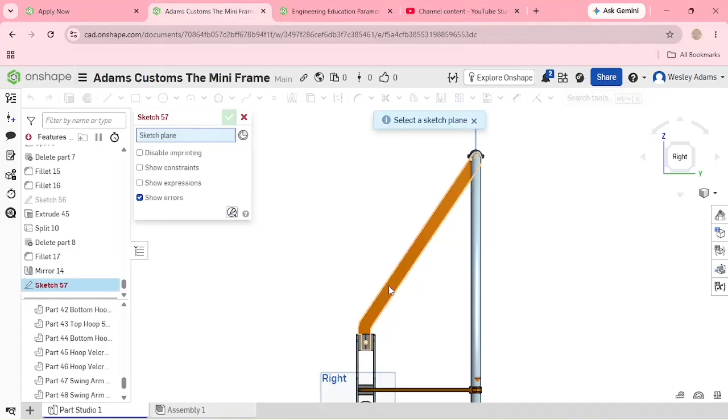Left click on the spar, left click on the line tool. Let's come down here, let's come off of that. Left click here, we'll touch this line, and that'll let us know that we're parallel there. Then pull that away and hit escape.

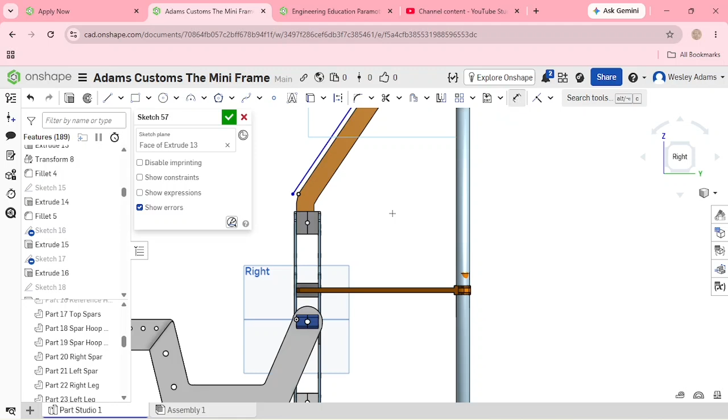Left click on the line, or left click on the dimension tool. So we'll go left click here, touch this line, pull this up. We'll make sure that's parallel.

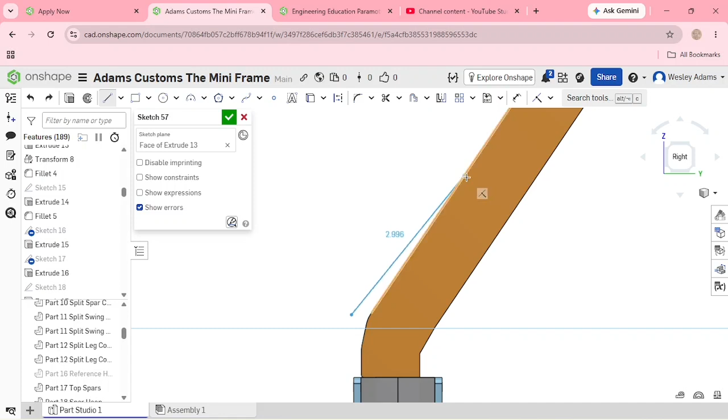All right, we're going to create the line. So let's select the line tool. Come over here, do not connect it to anything, so no yellow dots. Now we can come over here and make sure it's parallel. Let's bring this up. Left click, pull that away, hit escape.

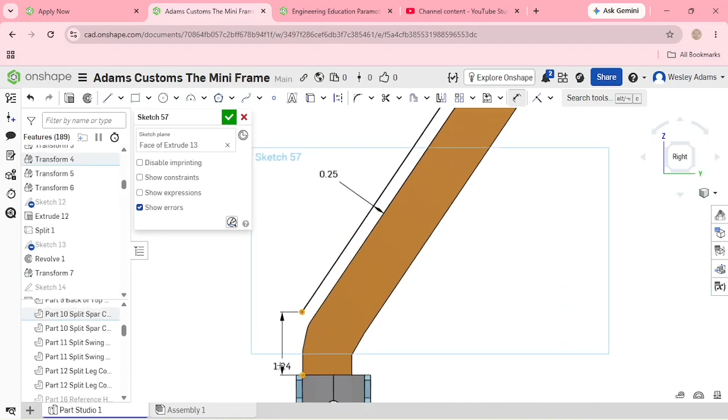Now let's go back down. Let's take this, select that line, select that one, and go 0.25 inches. Then we'll select this line to there. Let's go 1.25.

Green check mark, pull that away. 11.16, green check mark. Let's go ahead and make this line, very similar process. Let's pull this away. Make sure it's parallel. All right, green check mark.

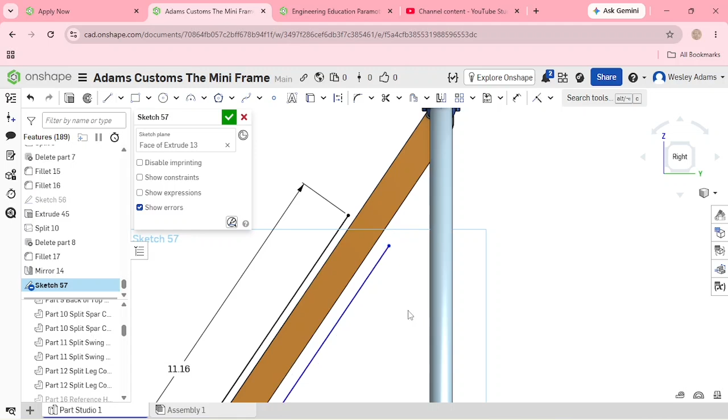Or go ahead and left click dimension tool, left click on this one. Let's make that 12 inches. Let's make that a quarter inch away, so 0.25. There we go.

Let's move that line up. So I'm going to take the dimension tool off. I'm going to left click on this blue line. I'm going to try to pull this up and keep it parallel.

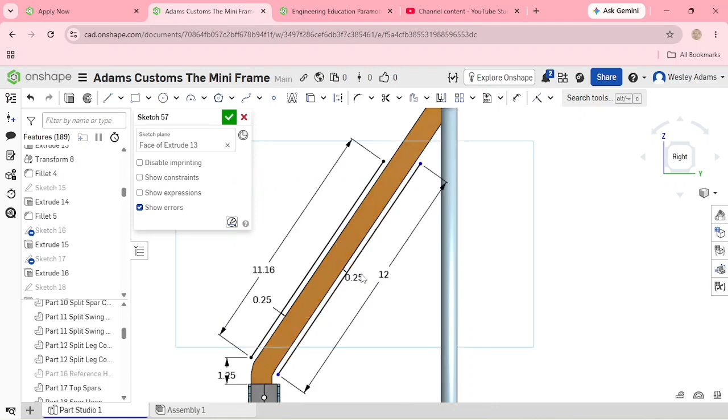So I'll select dimension tool, select here, here, left click. Let's do 0.80, I should move that up. Good, and we want those to be offset like that.

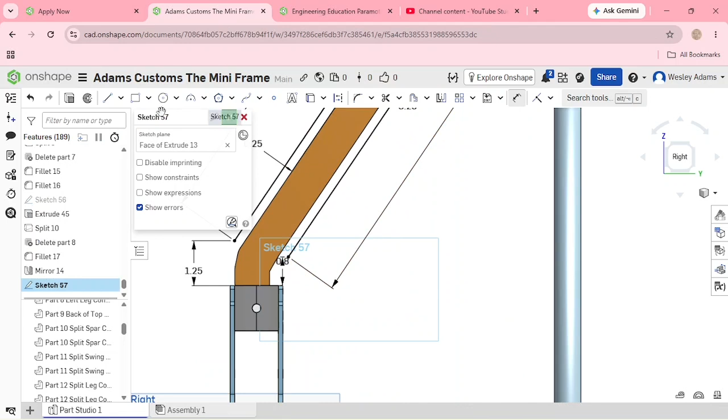So let's go left click, click on this one, click on that one. Doesn't matter the length there. Let's go up here, we'll connect these lines. Left click on the line tool, left click here, left click there. And I think we have everything set.

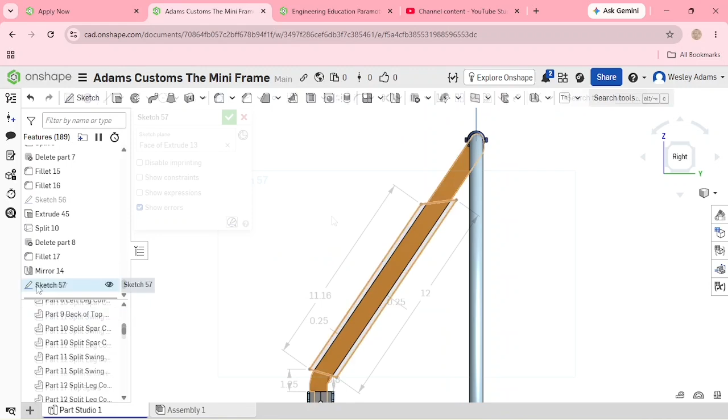I'm going to green check mark just to save it. So let's go close that. Let's go over here.

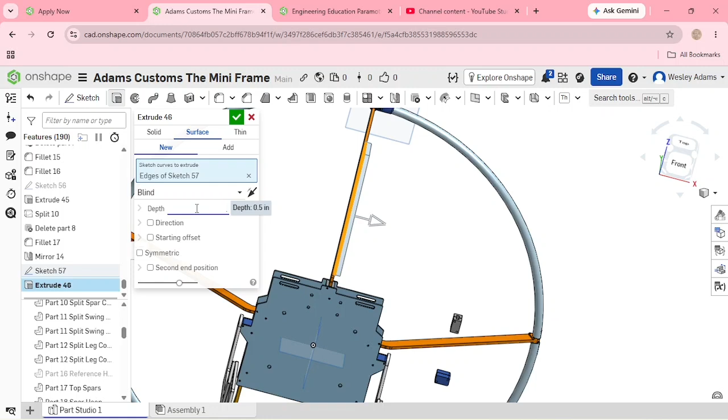And then I'm going to go extrude, sketch, solid new, 0.5. Let's do a negative 0.2. Let's see how that does. Depth is going to be 0.5 like we had before.

We'll go down here to starting offset. That's what I didn't change. Negative 0.2. It needs to be solid, not a surface, with those settings. All right, so it should be solid new, half inch, 0.2 on the offset.

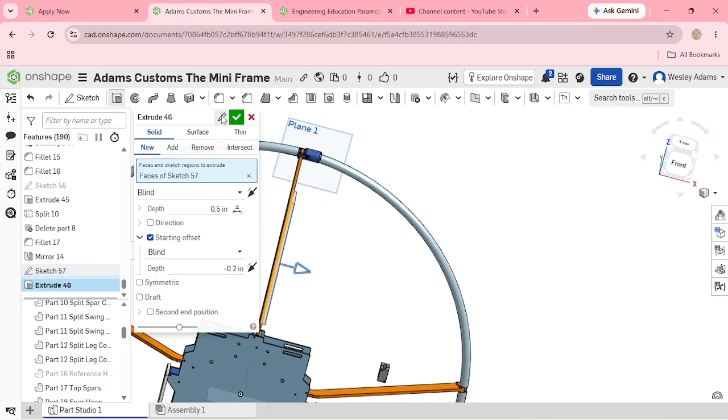All right, we're going to do more on that offset. Let's go 3.7. There we go, that'll do. Let's see, is that on there? Yeah.

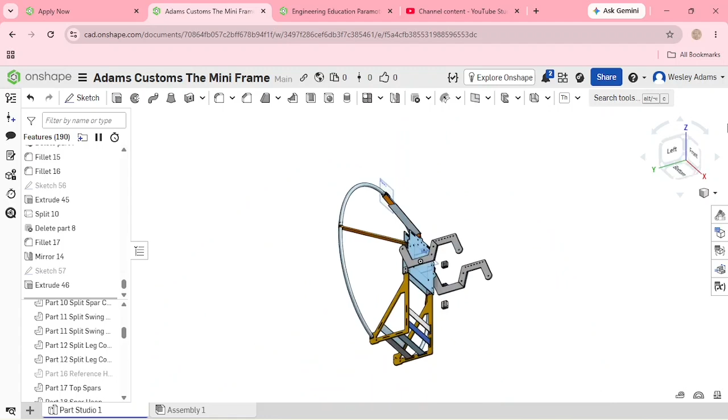So we know that's a quarter inch. So let's go and make this a little larger. We're going to go front view. We're going to scroll this around. We're going to turn everything else off except for the spar.

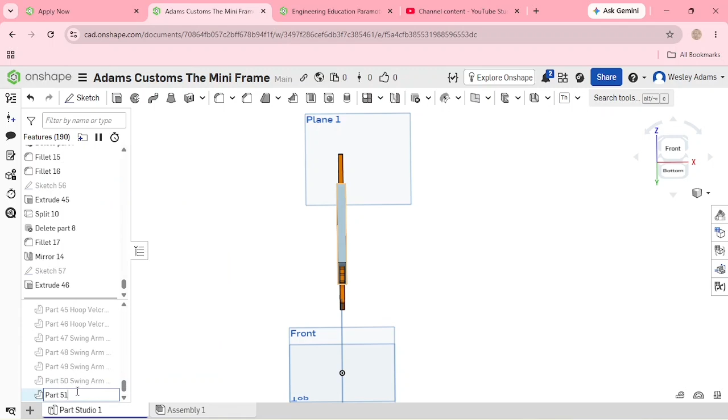We're going to go top spar. Go back to this extrude. It should be solid new. Right there, part 51, spar cover.

Left click sketch, left click here on the face of that extrusion, left click, we're going to use this corner rectangle tool. We're going to go right around this.

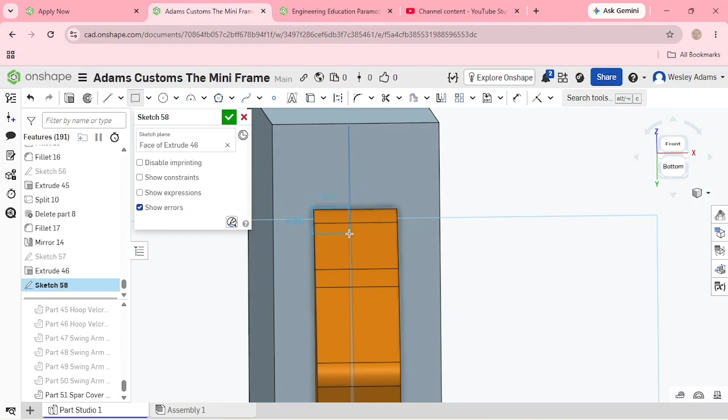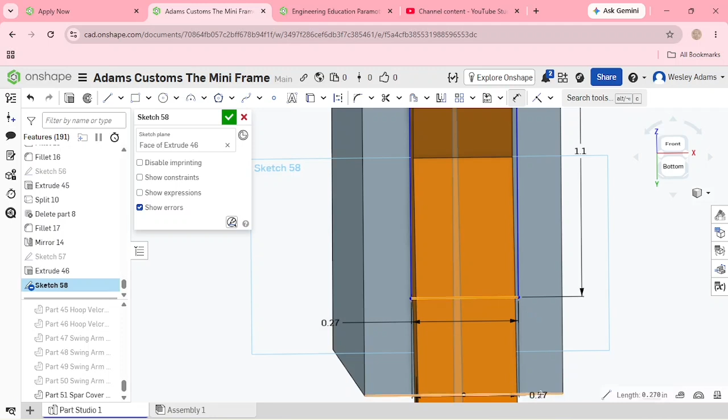Dimension tool, that should be 0.27. That's right. Dimension tool over here, let's do 1.1 here. We'll set this 0.25 there.

And that seemed to work pretty well for what we created before out here. We may be off there. All right.

0.12 here, let's see if it's the same on this side. My dimension tool here, we're going to go 0.115. Get that, yeah, now we're even. So green.

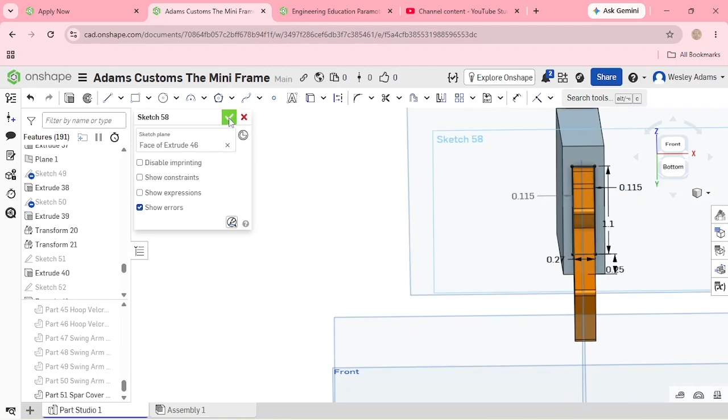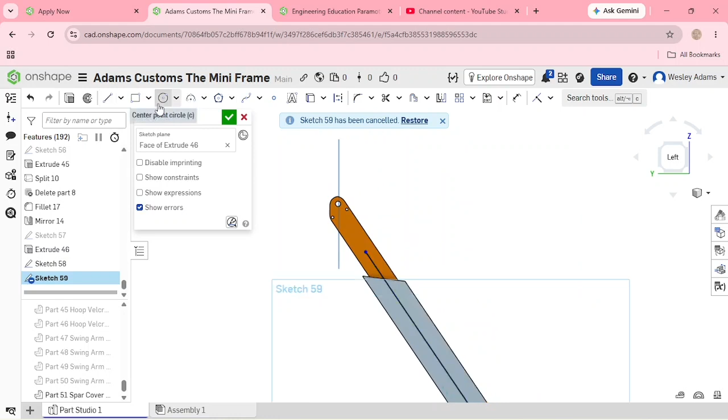Let's go left, left click on line. We're gonna come out here, right there. We're going to scroll all the way through. We're going to select this line so we'll know if we're parallel. Then we're going to pull it away.

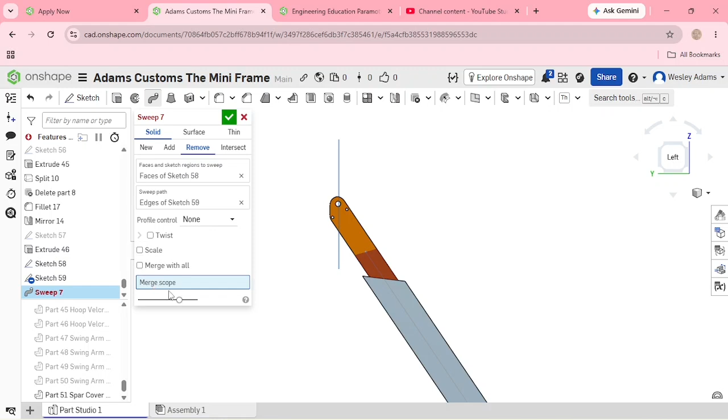Green check mark, we're going to go sweep. Select the rectangle that we use, that's sketch 58. We need the path, that's 59. We need it to be solid remove. And then we need to merge scope with this, only that, not merge with all, because we don't want to cut anything off of our spar.

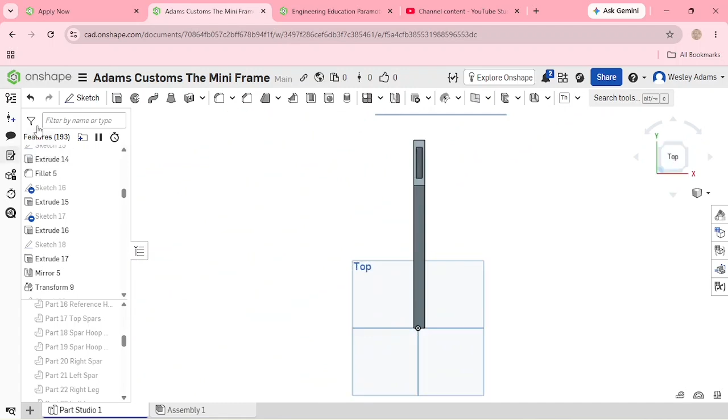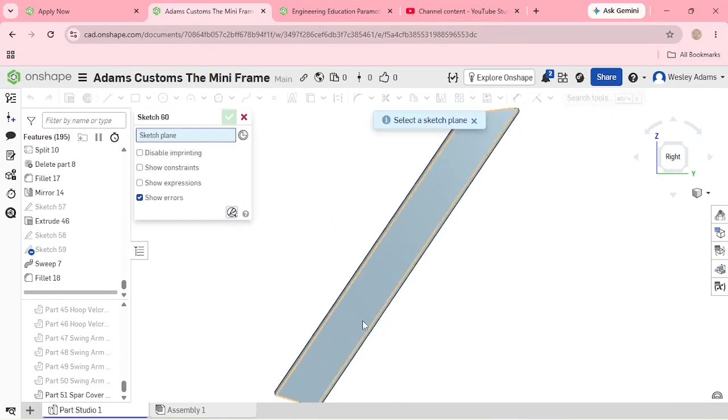Green check mark off for just a second. That looks good, that looks good. And let's go over and use our fillet tool on these edges so they're not too sharp. We'll give it a rounded edge. Good, green check mark. So left click sketch, left click here on the face of that part.

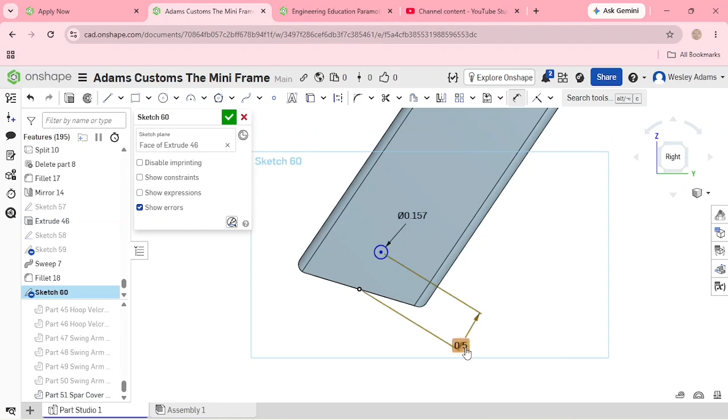Select this, expand that out. Dimension tool, select the outer side, 0.157. Select the dimension tool, select the center of that circle, select right there. Well, let's set that at 0.5. Actually, let's set that at 1 inch.

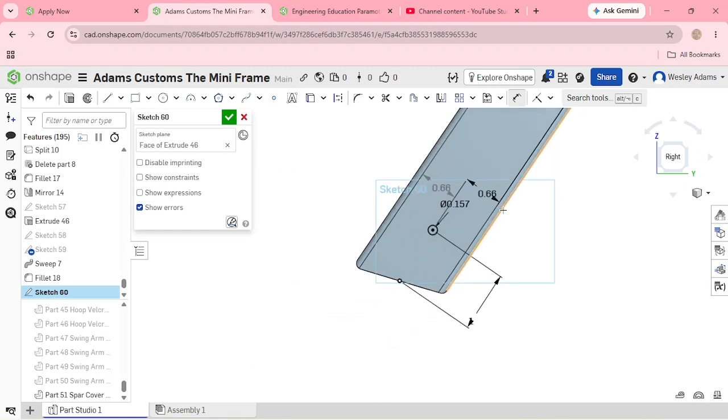And then let's make sure that is centered up a little bit. So that's 0.71. What is this one at? That's 0.6, so that's the greater. Let's go 0.66, let's see what that does. There we go. We'll do the same thing up here.

It's going to be a little different because we've got this edge here, but we'll do it from that an inch down. Center point circle, create your circle, outer diameter, pull it away, 0.157. We'll go center of the circle, 0.66. That should be the same over here.

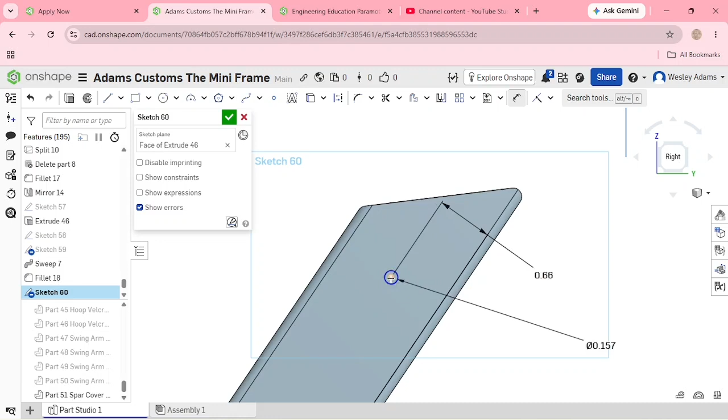Good, and we'll set that an inch from there. Let's bring that out and go 1 inch exactly. Green check mark. Let's go back up and turn our top spar on.

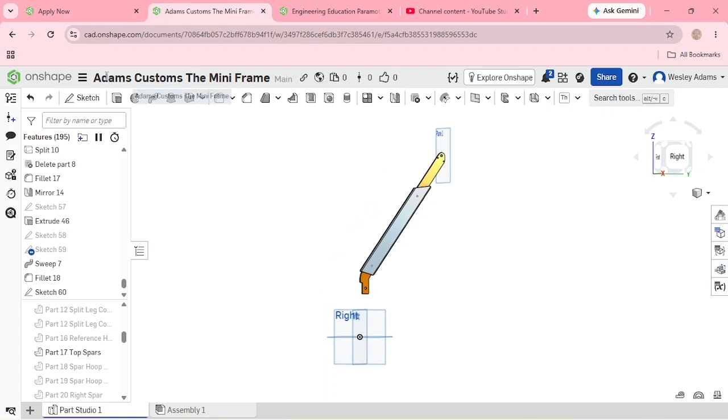We're going to go extrude, select sketch 60. It needs to be solid remove. We want to do merge with all, so it goes all the way through it. Then green check mark. Let's look at that and verify it went through. Yep, it went through both the spar and the cover.

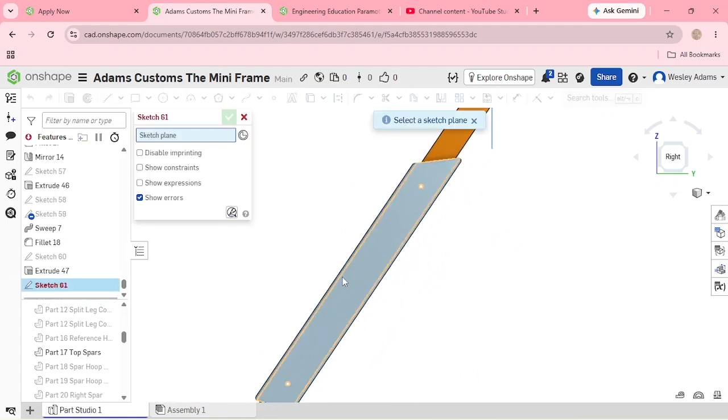Scroll in, left click sketch, left click on the part, left click on the text, because if it touches a line, it's going to stick. S1 for spar 1. Green check. Do not let it touch a line. All right, that's going to be good.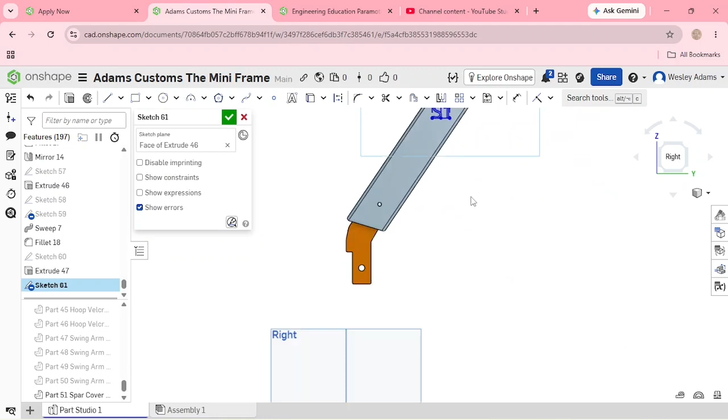And now we'll set this center from that center at 4. Hit enter. That's pretty good there. Turn off the dimension tool. We should be able to kind of drag it around a little bit. That's good. We'll do the other ones like that as well. Green check mark. Turn to the side.

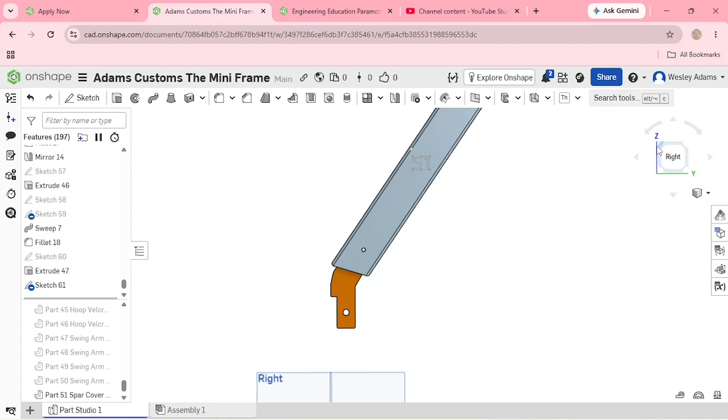We're going to extrude this. We're going to add, so solid add. And we want to select that sketch. That is way too far. 0.0625. And then green check mark. There we go.

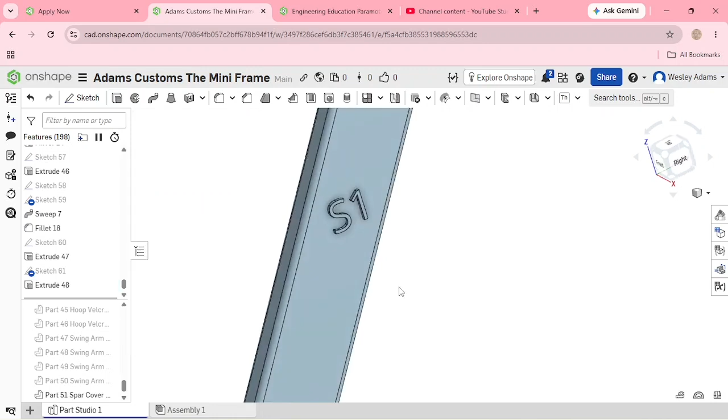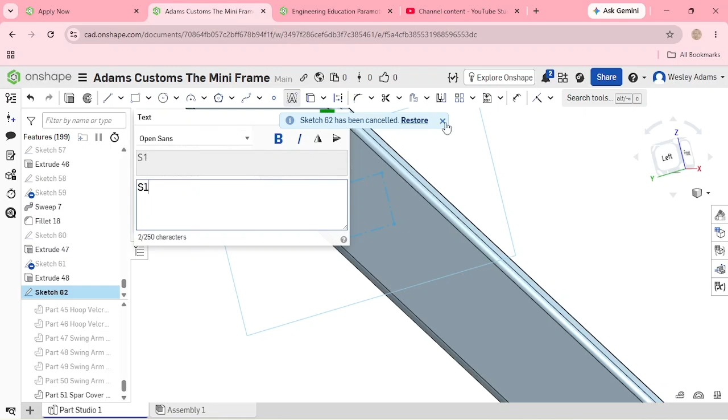So let's go sketch, click here. Let's scroll out, so there's our new sketch. We're going to left click on the text. We're going to left click here. We're going to drag that out. This is going to be S1. Green check mark. There it is.

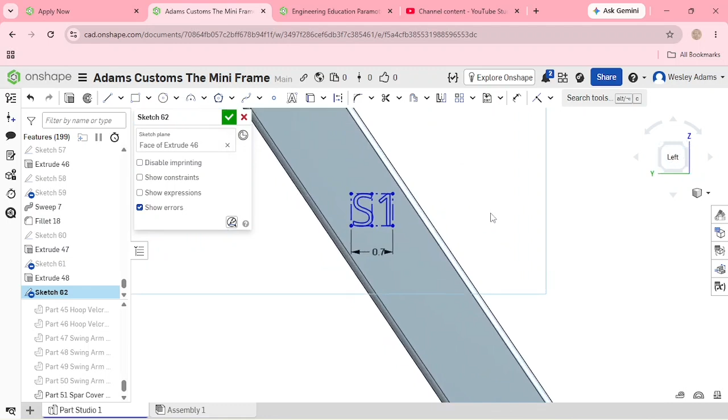We're going to scale that to 0.7. I'm going to have to move that back up real quick. I want to be in this left plane. And then this is going to be

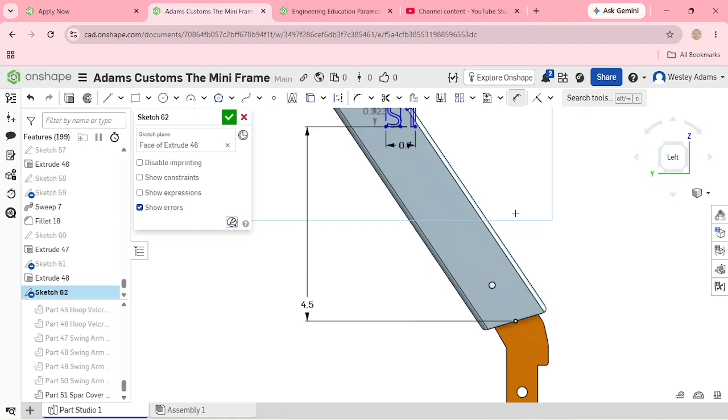0.523. That's fine. Check. We're going to take this, come down here with the dimension tool, select that one, and that's going to be what, 4.5? Check. Or 4. I think we did 4.

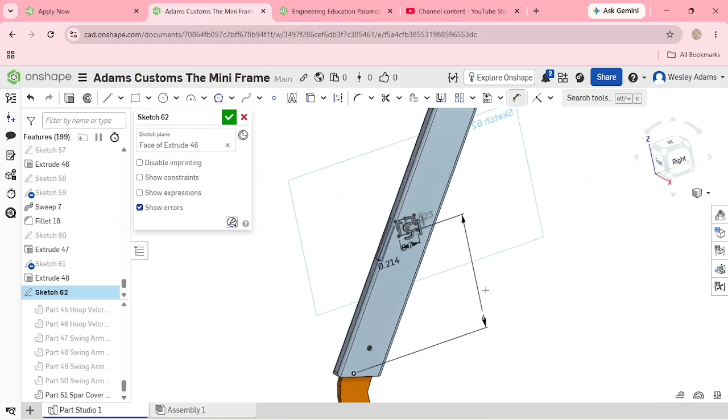Yeah, so that's something I didn't do, is set this from the edge. Let's see what that other one was, so we can get it centered up the same way. So green check mark here.

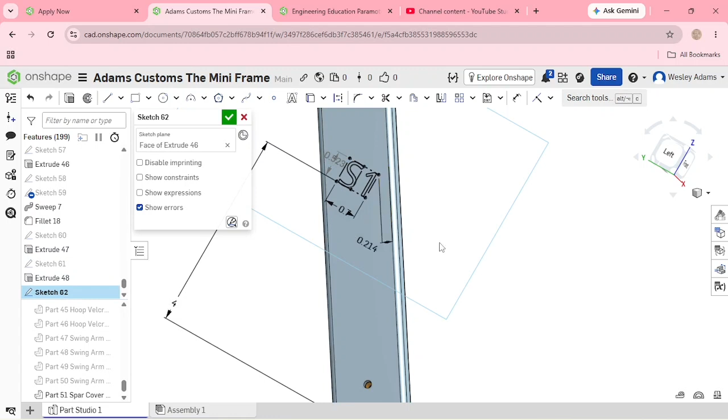We're going to go back up here. We're going to select this, so we already know we have the height. And we're going to go 0.199 on this side. Green check mark. 0.199. Check mark. There we go. Check mark on that. And now we'll go extrude.

Sketch. Should be solid add. We want that to be 0.0625. And then check mark. There we go. Now I'm going to go up here.

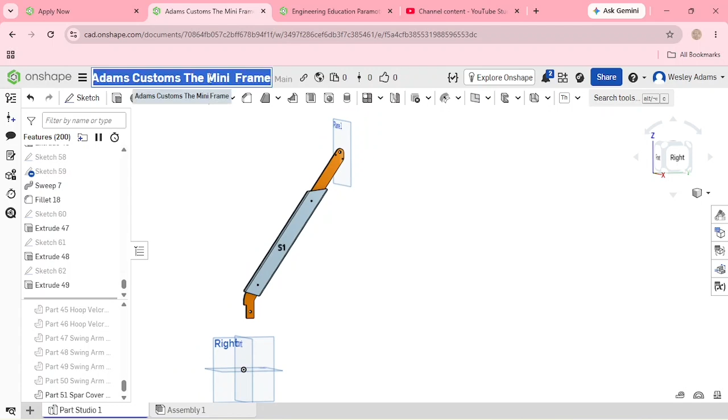And I'm going to change this name. We're going to call it the Hike and Fly frame.

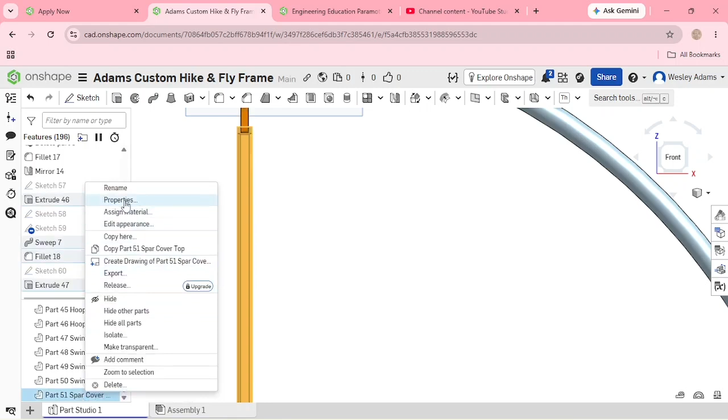Let's go copy here. Just leave it there. All right, that should have created a new part. It did. Now let's go up to our top spar.

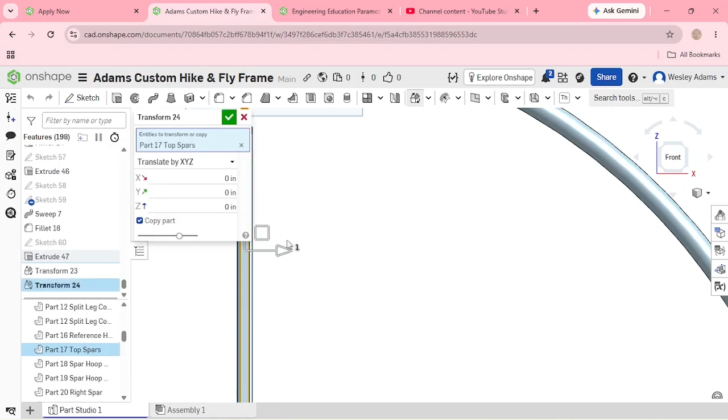We're going to do the same thing. We're going to copy that top spar. Copy here. Green check mark. All right, so we got both of those. The original there off to make sure we have those copied. We do. So let's find out where that's at. All right, there we go.

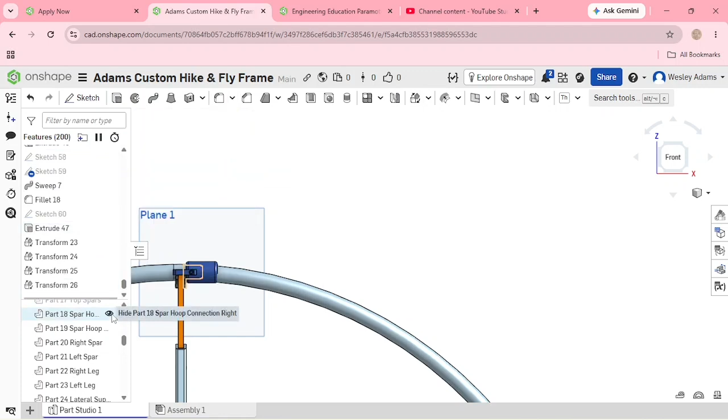Spar. Hoop connection. Let's go copy here. Check. Copy here. Check. Let's turn those off. Let's go here, here, and here, and then right click and go boolean.

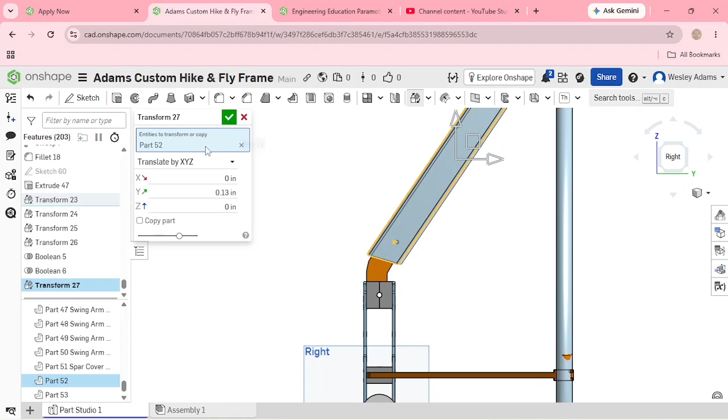So I should make one single part. Transform by X, Y, and Z, and not by much. Let's do front and back. All right, so now we know those are not aligned. That's on purpose. And that.

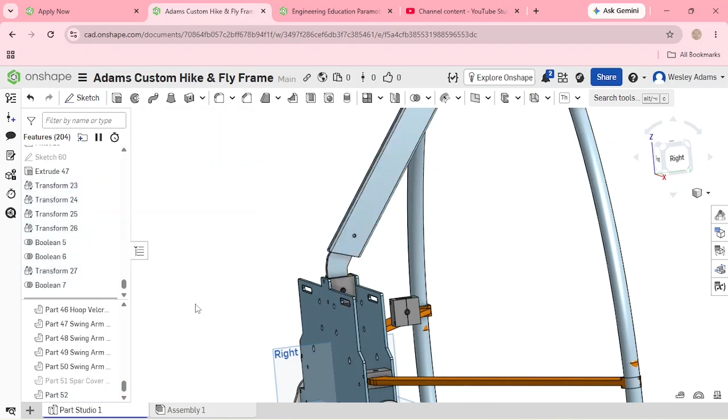All right, those are what we want to combine. So let's go left click, left click. They should be touching now. Should be able to combine them. Yes, so that's all one part. And the reason I did that is because that being one part will be way easier for us to move.

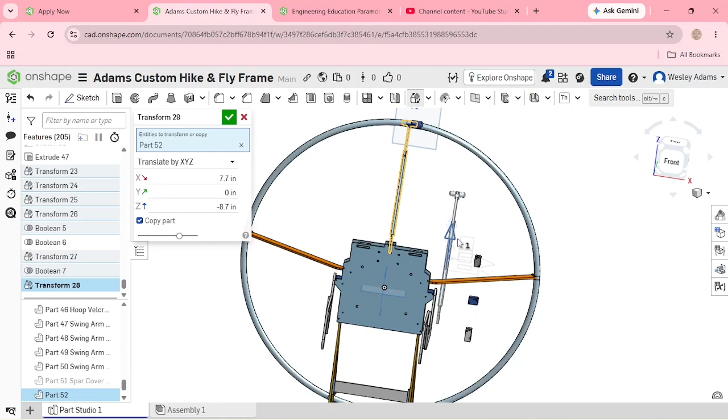Copy here. Let's pull that out. I think this is going to be easier for us to rotate than that cover by itself. Find the right mate connector, and it is right around in there. And then that brought it, so I clicked it on this one, and then that brought it level.

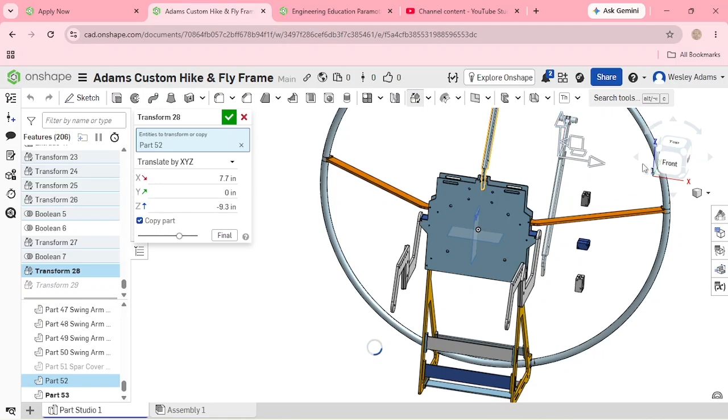So we're going to hit green check mark, and we're going to go back up to our original transform. We're going to move this up until we can get it to our location that we need it. Yeah, we could come in a little bit, I guess. 5.25. Green check mark. Yeah, that'll do it.

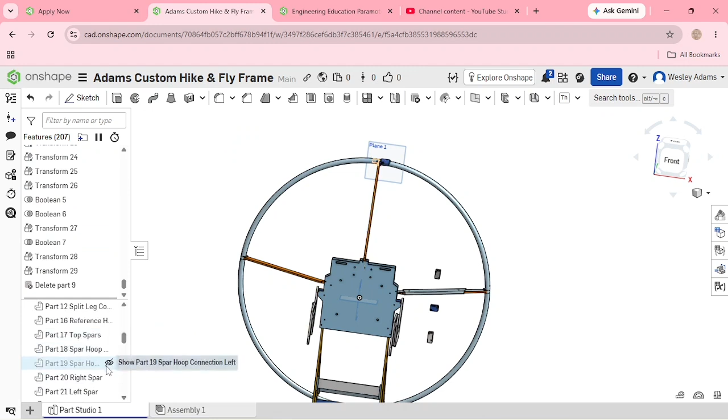Let's delete that. Yes, let's go turn our top spar back on. Turn our hoop connections back on. Make sure we didn't delete any of those. Nope, they're there because we want those to be able to print.

And we're going to mirror image this one. So our right spar is right there. We're going to delete it. We don't need it anymore. Our left spar is over there, but I'm going to wait before I delete it.

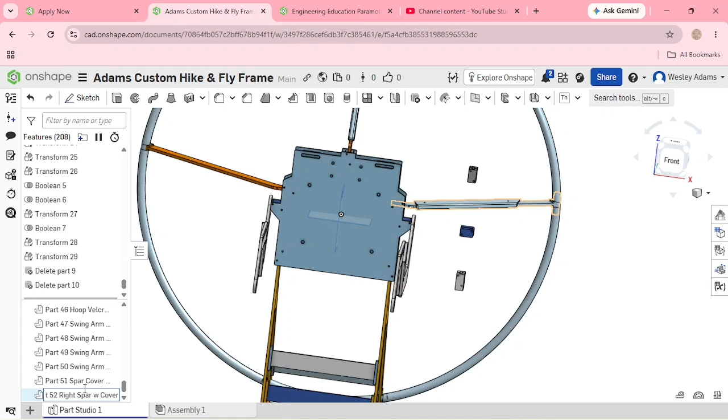Let's go down here. We'll turn that back on. We'll rename this part 52 right spar with cover. And then we're going to left click that.

We're going to go up here to mirror. We're going to use the navigation cube and select mirror plane. Hit green check mark.

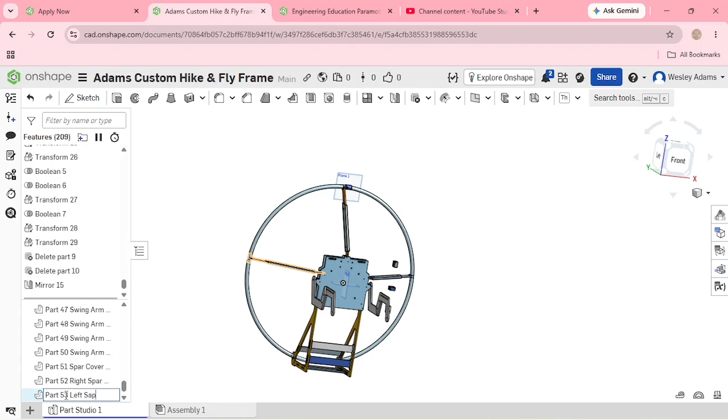And this one should be renamed to part 53 left spar with cover. What we're going to do is I'm just going to put that text over here, so if somebody wanted to set up their text, this is for the Atom 80 bolting pattern, so we'll put the text somewhere in between that so it won't interfere.